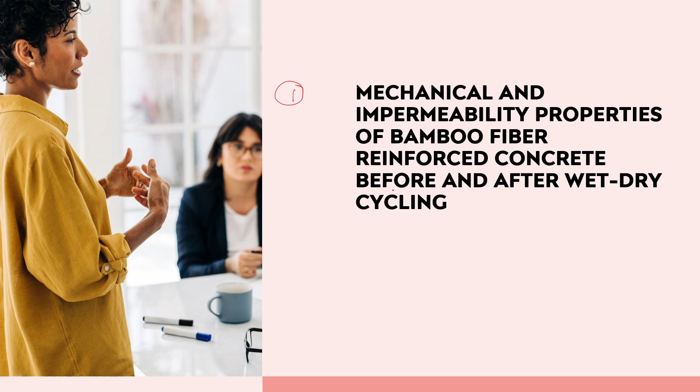So first is mechanical and impermeability properties of bamboo fiber reinforced concrete before and after wet and dry cycling. In this paper, they used bamboo fiber and treated that bamboo fiber with calcium hydroxide, that is Ca(OH)2, to remove surface impurities, enhancing their uniformity and stability.

The results are: concrete reinforced with treated bamboo fiber exhibited improved compressive and tensile strength compared to plain concrete. So results are good. The addition of treated bamboo fiber reduces the water absorption rate of concrete, so it enhances impermeability. Concrete is becoming impermeable.

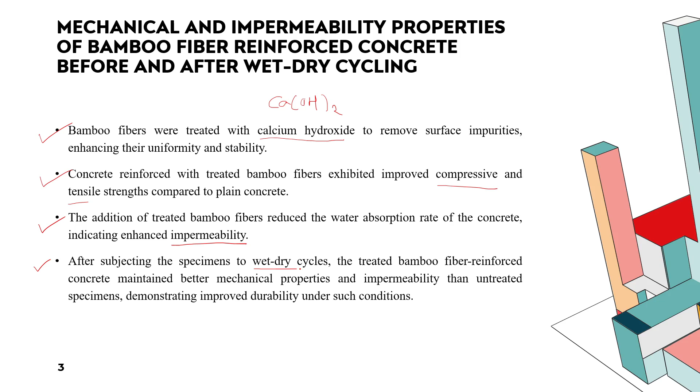They carried out the wet and dry cycle, and then they tested the cubes. I will give the link of the paper in the description box where you can study in detail. But here, for the wet and dry cycle, they used 25 degrees Celsius water, and they put their cubes in it for 20 hours,

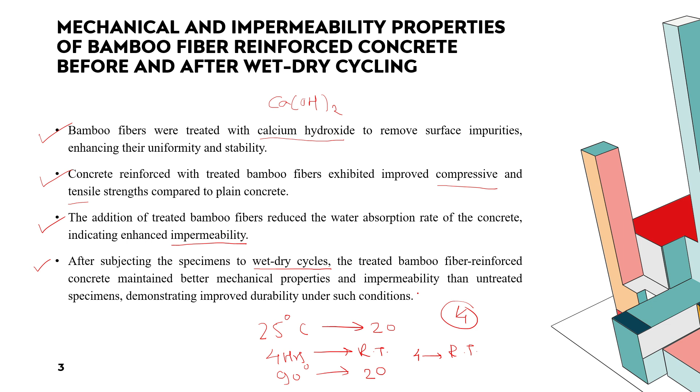then kept them 4 hours at room temperature, and then kept the cubes in the oven at 90 degrees Celsius for 20 hours, and then again 4 hours to cool at room temperature. They did this cycle for 14 days, so 14 cycles they carried out.

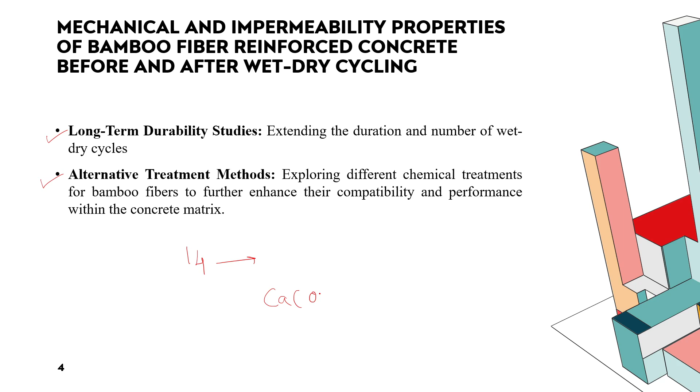So what you can do in this: you can check the long term durability, like extending the duration and number of wet and dry cycles. They basically went with 14 days; you can go more. Alternative treatment methods: they used calcium hydroxide, so you can use any other pre-treatment.

Second, enhancing the strength and the environmental performance of concrete with pre-treated crumb rubber and microsilica. In this paper, they investigated the effect of pre-treating crumb rubber, from tire wastes. They treated this with NaOH, added microsilica also, and evaluated the mechanical and environmental performance of the concrete.

The findings suggest that these modifications improve the workability and strength, indicating the potential for broader structural application and enhanced sustainability in future concrete formulation. So you are making the concrete environmentally friendly, using some waste material and making the product.

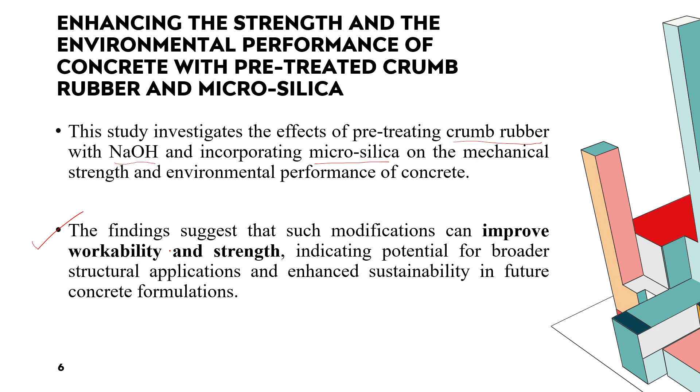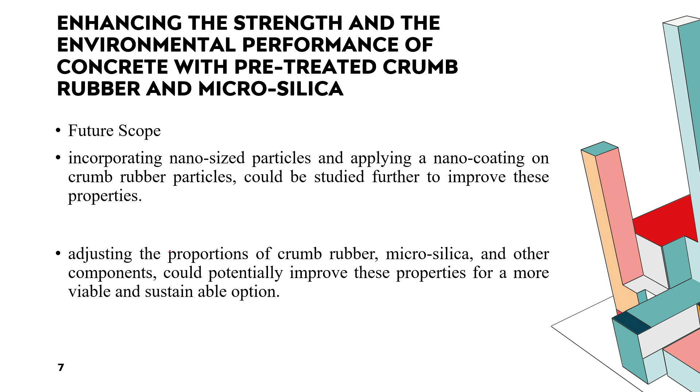So what you can do here: you can apply some coatings of nano sized particles and check their behavior, or you can adjust the proportion of crumb rubber and microsilica, or add some other component also, so that you can enhance the strength of the concrete.

Next is fiber reinforced recycled aggregate concrete with crumb rubber. Here they used fibers, recycled aggregate, and crumb rubber. The application of fiber reinforced rubberized recycled aggregate concrete is almost a new concept in the construction industry, so more research is required on different properties of RRAC and FRRAC, that is fiber reinforced rubberized recycled aggregate concrete, before establishing them as an alternative to natural aggregate.

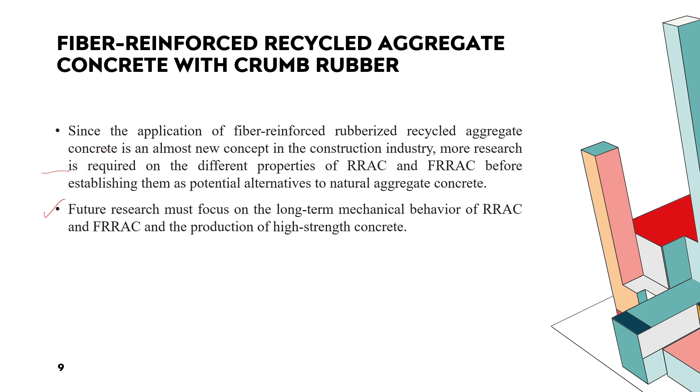So you can compare here. You can change the proportion also. You can go for durability studies like acid attack, or you may go for high strength concrete design using these components or materials.

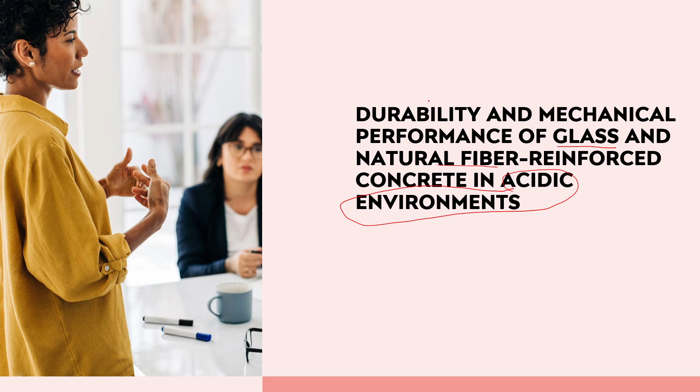Next is durability and mechanical performance of glass and natural fiber reinforced concrete in acidic environment. There are glass fiber and natural fibers, tested in acidic environment. In this paper they added 1% treated coir fibers, rice husk fiber or glass fiber, combined with 5% silica fume. They found improved compressive and tensile strength of the concrete. Notably, glass fiber reinforced concrete exhibited the most significant enhancement.

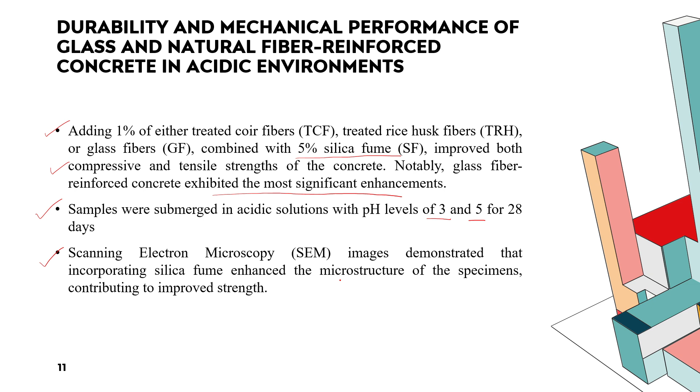For acidic environment, they prepared the samples and submerged them in acidic solution with pH 3 and 5, and kept the samples for 28 days. Also, they performed SEM, which demonstrated that incorporating silica fume enhances the microstructure of the specimen, contributing to improved strength.

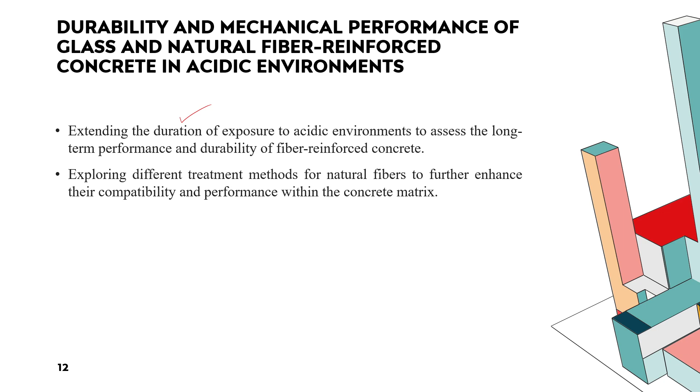So what you can do here: you can change the duration of exposure to acid environments to assess the long term performance and durability of fiber reinforced concrete. Basically you can change the duration. You can explore different treatment methods for natural fiber to further enhance their compatibility and performance with the concrete matrix.